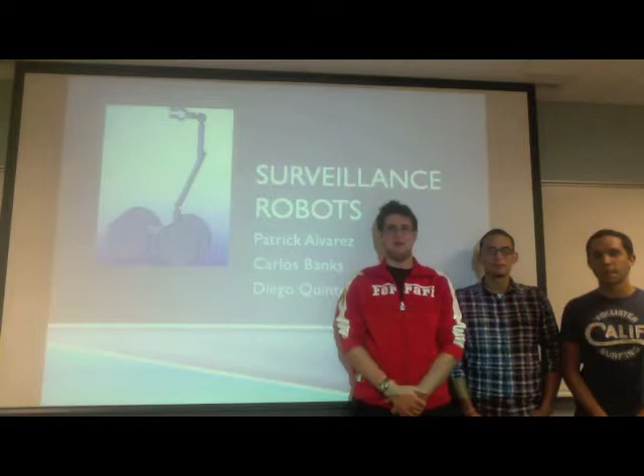Hello, my name is Patrick Alvarez, this is Carlos Banks and Diego Quintero, and for our modeling and design of robots class, we were tasked with the project to review surveillance robots.

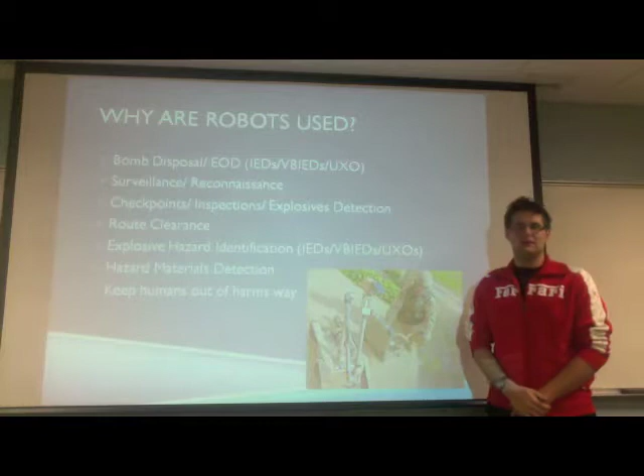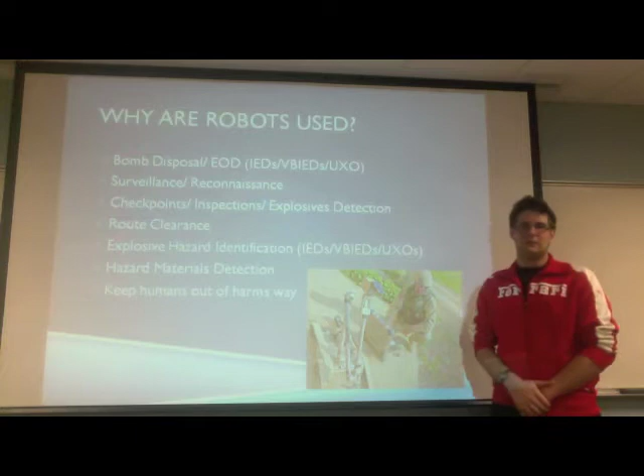So why are surveillance robots used out in the real world? Now, surveillance robots are tasked with objectives that could be dangerous or harmful to human beings. They're used in the military to perform tasks such as bomb disposal, surveillance and reconnaissance. They go through several checkpoints and they inspect several areas, mainly for explosives.

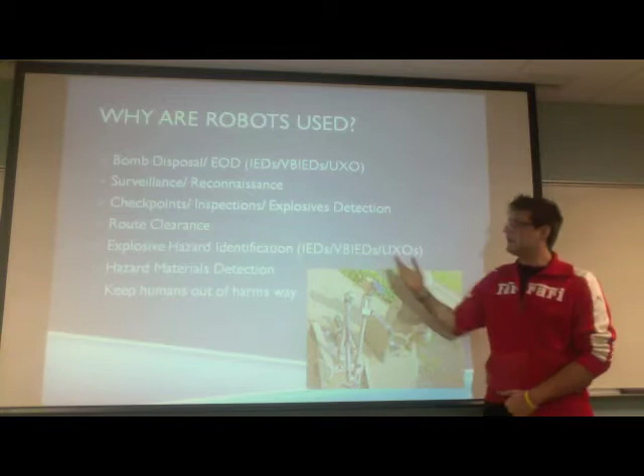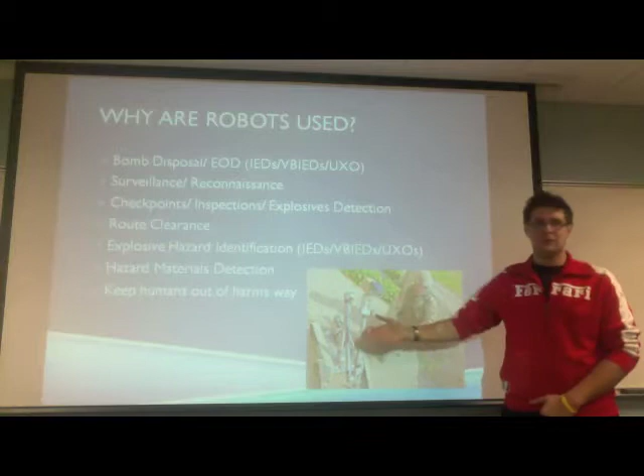They clear the routes ahead of the troops to make sure that there's no hostiles in the area. They perform explosive hazard identification and hazardous materials detection. And this is all with the sensors that are on the robot.

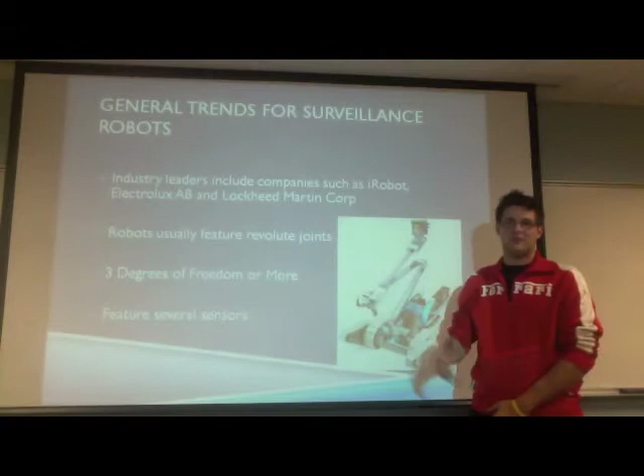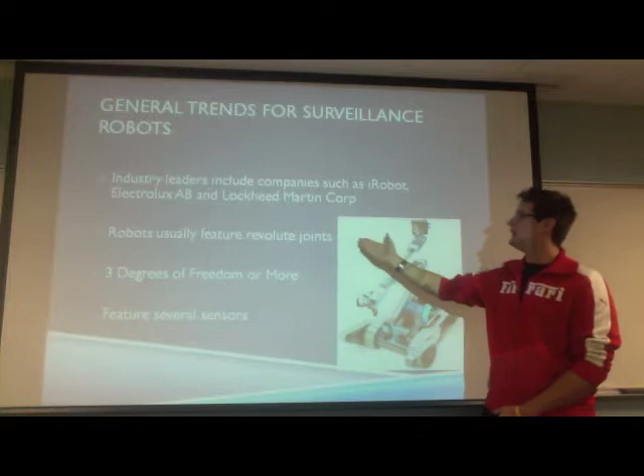General trends for surveillance robots. In this industry, there are three main companies that lead the way for surveillance robots. These companies include iRobot, Electrolux AB, and Lockheed Martin Corp. These companies are the ones that take innovation to a whole new level and develop new surveillance robots constantly.

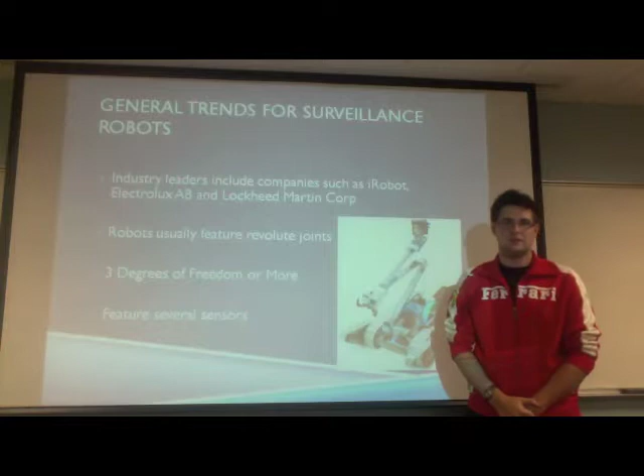Now, surveillance robots usually feature revolute joints. The main surveillance robots feature these joints. Of course, there are some robots that feature prismatic joints as well. They usually carry 3 degrees of freedom or more, depending on the application they are needed for. And of course, they feature several sensors for all the tasks that they are tasked with.

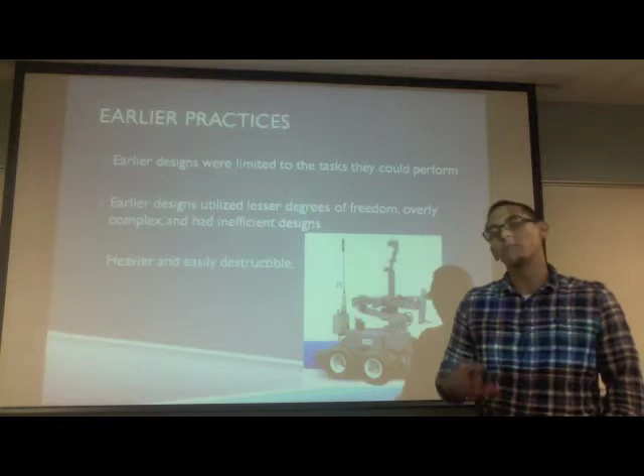Some earlier design practices for surveillance robots include that they were limited in the tasks they could perform. What this means is that they could only perform 1 to 2 applications at a certain time, whereas robots nowadays are able to conduct more types of applications. Also, earlier designs utilized fewer degrees of freedom. What this means is that they could only go up and down or left and right.

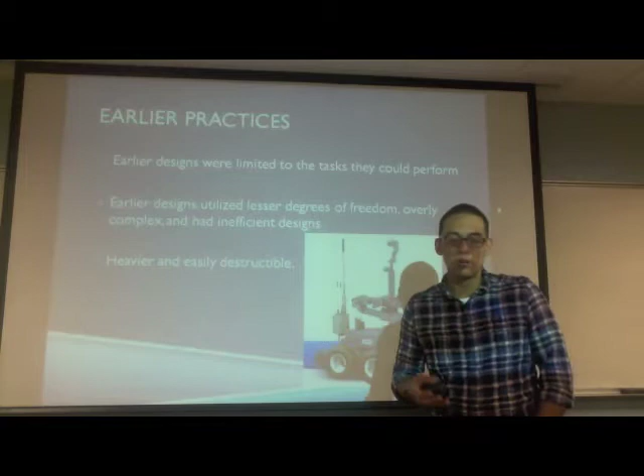And also, the designs were more complex and inefficient. Back then, the technology that they had to put inside the robots was cumbersome and inefficient. Also, the robots were heavier and were easily destructible, whereas nowadays they're reinforced with stronger materials. And as you can see in the future slides, some of the applications they can perform.

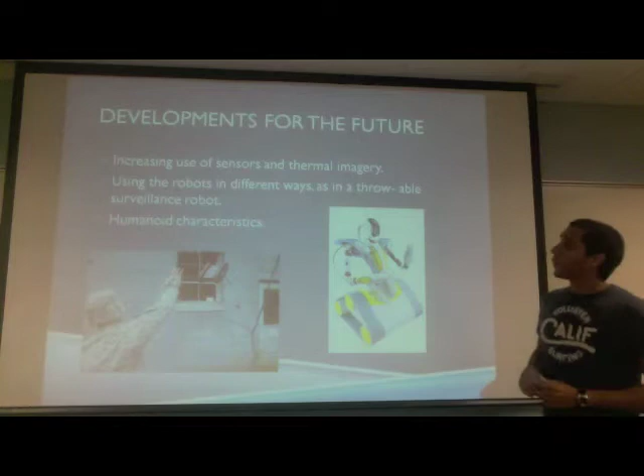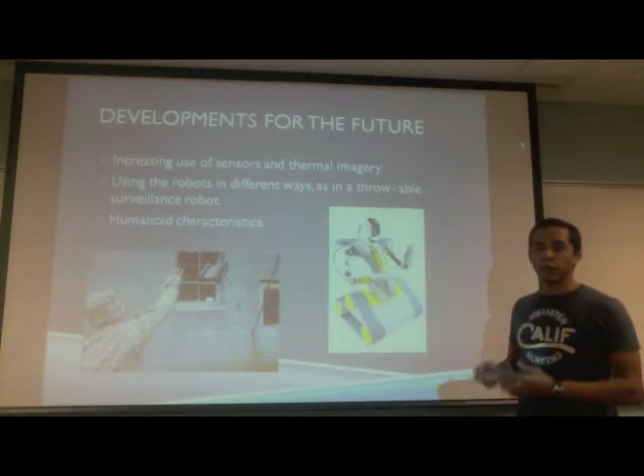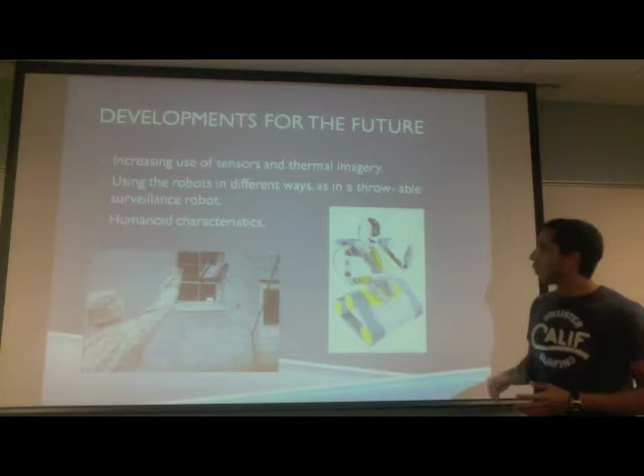Developments for the future for this type of robot include the increased use of sensors and thermal imagery in order to detect human bodies. Also, this robot could be used in multiple applications and could be used to do multiple tasks at the same time. This robot will also acquire humanoid characteristics, as you can see in this picture. The robot will pretty much look like a human. That design allows them to have more degrees of freedom and perform their tasks with more efficiency.

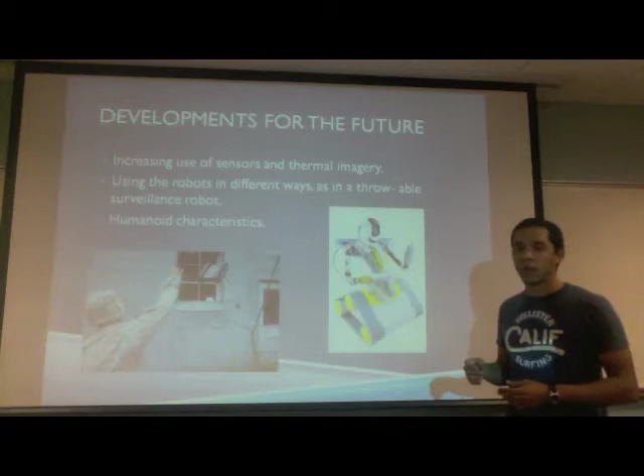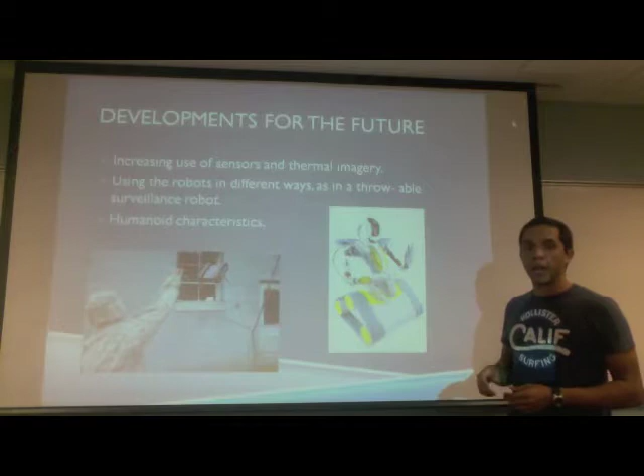Also, the materials to be used in the robots of the future include very high quality material that will allow them to endure and go through tough terrain, and also they could receive high level impacts and keep performing their task without a problem. As you can see in the next video, it will show a robot from this company.

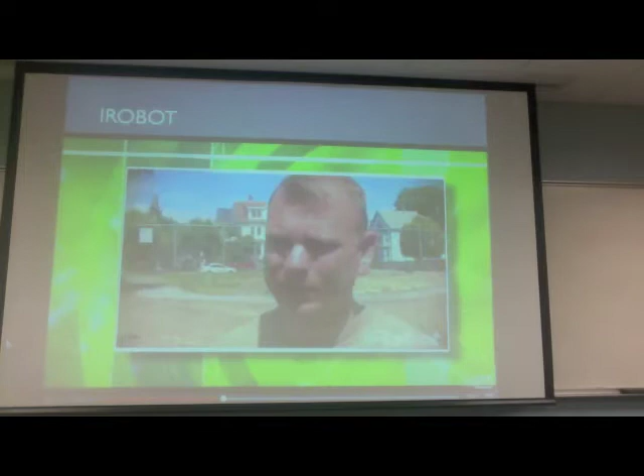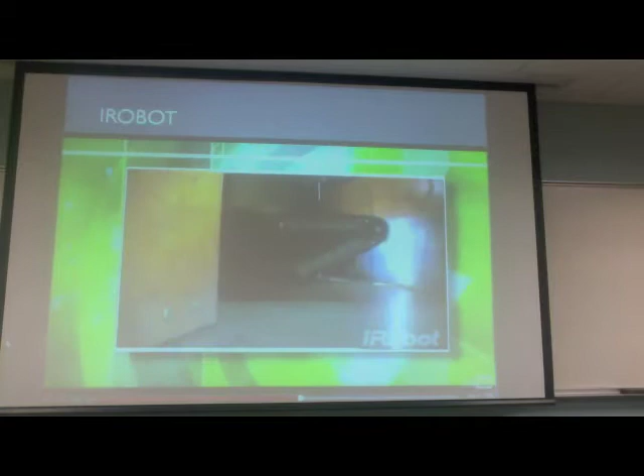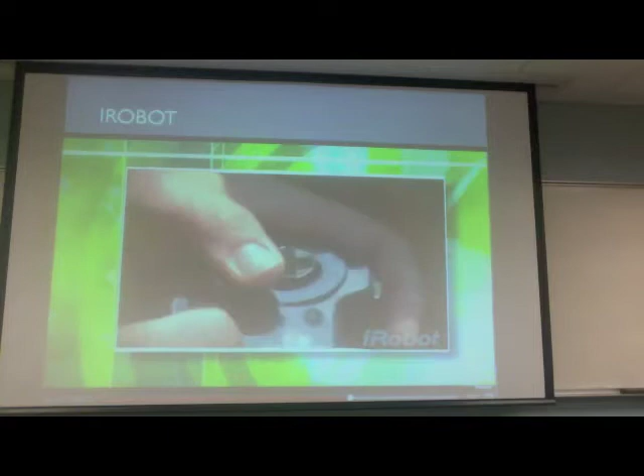Very versatile, very real. In a situation we don't have to actually put one of our attack team members too close to the situation. You just don't know what you're going to encounter. I see the delay. By having this, we can actually get eyes inside the building. Being able to push doors open, get around doors, and look around corners, it's great. The video was perfect. The 3D model in the bottom right corner makes it a lot easier to see exactly what the robot's doing. Picking up suspicious devices, looking through windows of cars, underneath cars, inside buildings to locate barricaded subjects. You can really remove the officer from any danger.

As you can see in the video, this robot features very high-end characteristics and very modern features that will allow it to perform all of those tasks without any problem. Now, Carlos will discuss all of our designing process.

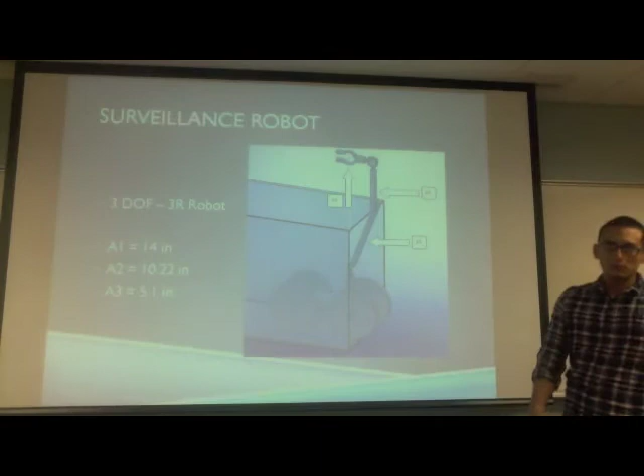This is the surveillance robot that we came up with. It's a 3 degree of freedom, 3 revolute joint robot. We picked a 3 revolute joint over a prismatic or a PRP or RPP robot, simply because of the availability and the accessibility that the 3 revolute robot offers to this design. Also, we picked a 3 revolute robot so it could comply with the tasks that we wanted it to do.

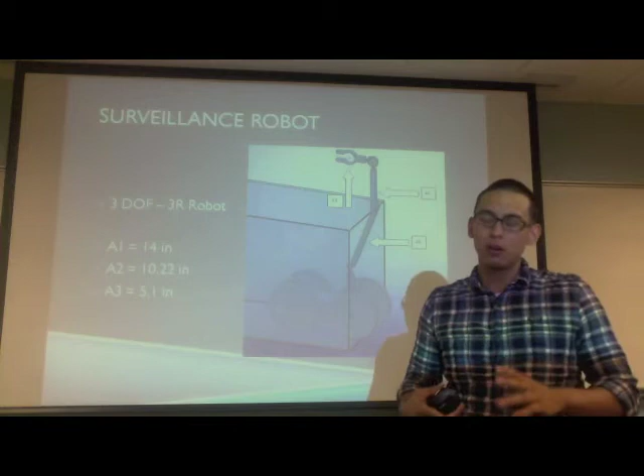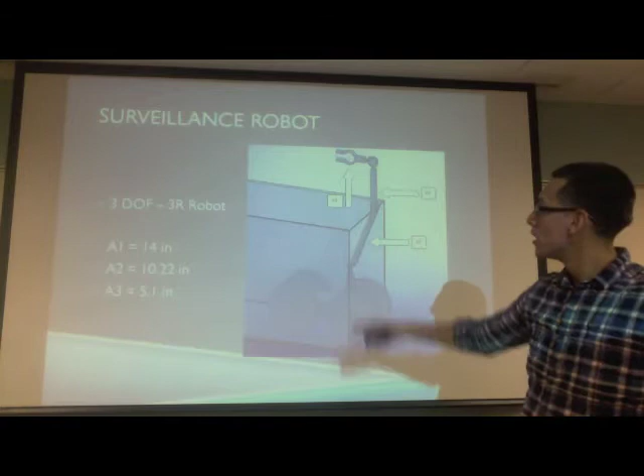For A1, we came up with a design specification of 14 inches. A2, we picked 10.22 inches, and A3, we picked 5.1 inches. The objectives for this robot, we wanted to infiltrate an air duct system with dimensions of up to 20 inches by 25 inches, or as low as 8 inches by 14 inches.

The duties for it to do was to detect possible threats above and below the air duct. Some of the things that we wanted to detect were possible hostiles or hostages in certain situations. We broke down the tasks into task 1, when the robot looks underneath the AC duct to inspect the area underneath, and task 2, to inspect the area above for other situations.

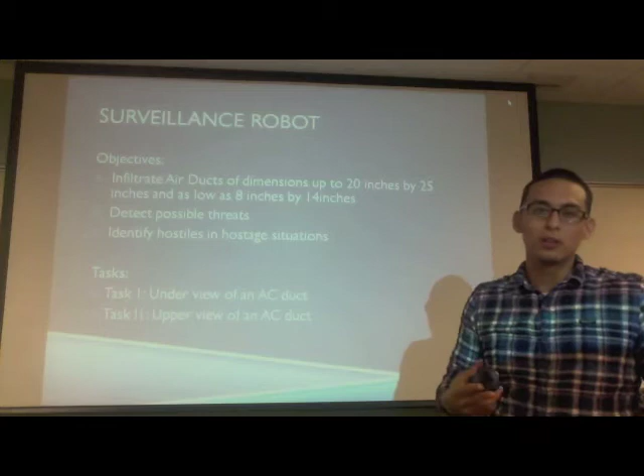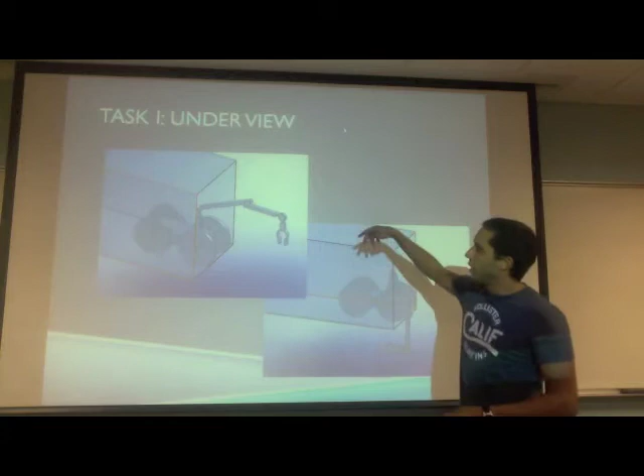Now, as Carlos said, in task 1 the robot will be performing an underview of the duct. So in the first position, it will start at 0 degrees, and the end effector will have a negative 90 degrees rotation pointing to the floor. Then it will move in a circular path all the way to 180 degrees in order to look all the way underneath the duct.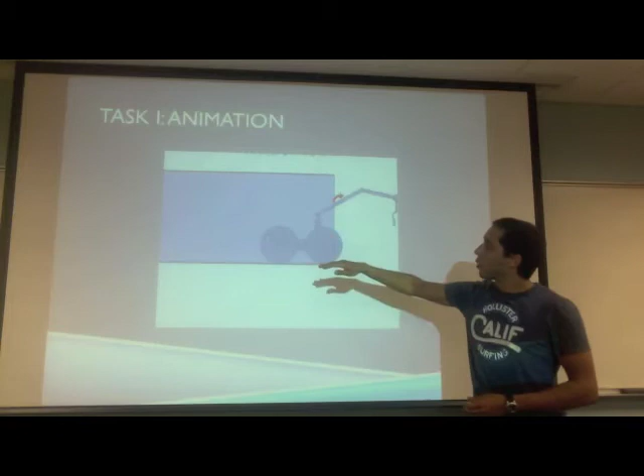If we go to the next slide, this is a rendering in SolidWorks, and as you can see, the robot starts from 0 and goes all the way through here and stops here in order to see all the way underneath the duct. Also, the robot will move on the line of the duct at this position, so it won't crash with either of the sides of the duct.

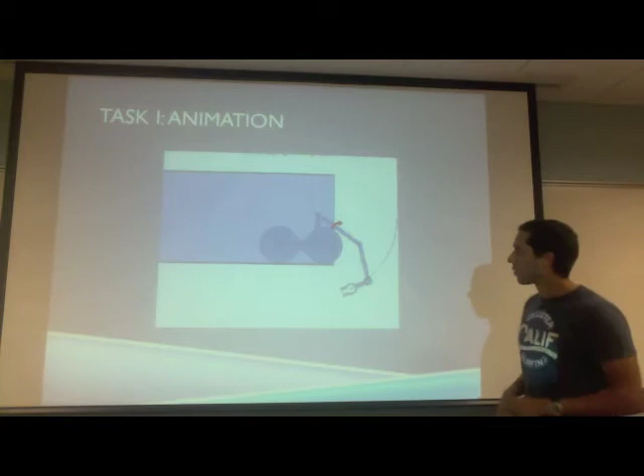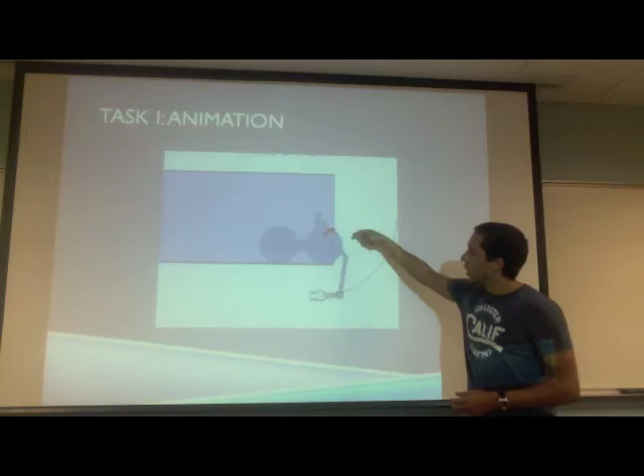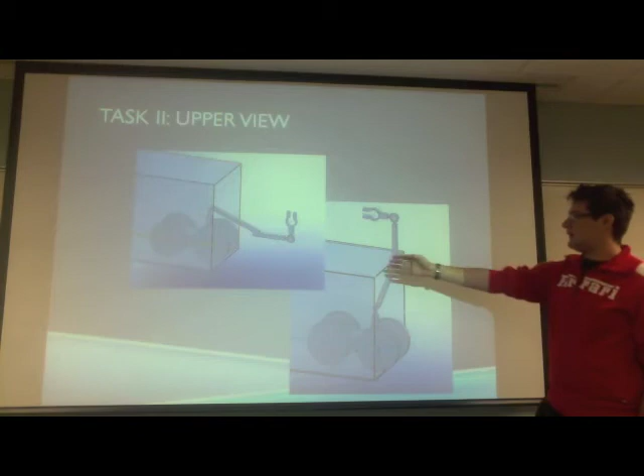Also, we designed our robots in order not to experience any singularity position, and not to crash when it goes down, not to touch itself or the duct. So in contrast, the second task had to be to look above the air duct. As you can see, our surveillance robot will start at positive 90 degrees and move to 180 to effectively see over the air duct.

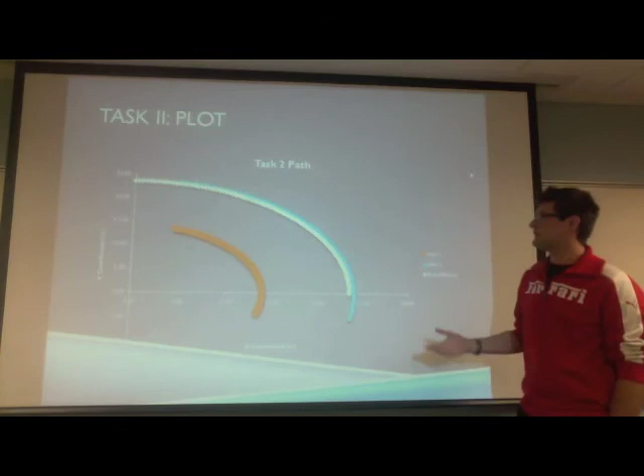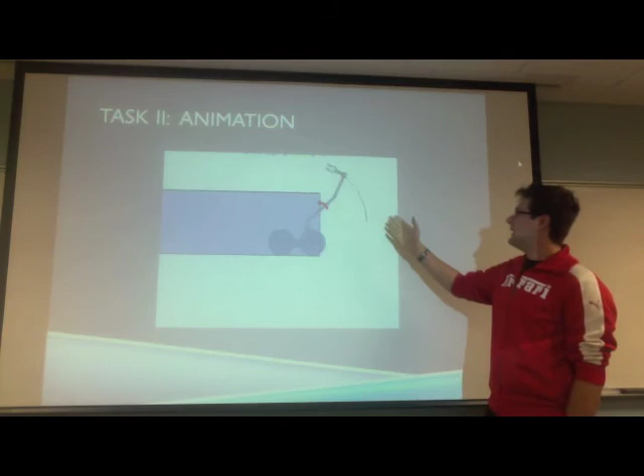As we can see in the task 2 plot, the plot is basically a mirror image of task 1. With the end effector movement, as well as the movement for joint 2, it moves exactly the same as task 1, and joint 1 moves with the same radius. There's no jumping between points, which also means it is not going through a singular position. As we can see here in the animation of task 2, it is performing the objective that it was asked to do, it is not making contact with any structures, and it is performing its task effectively.

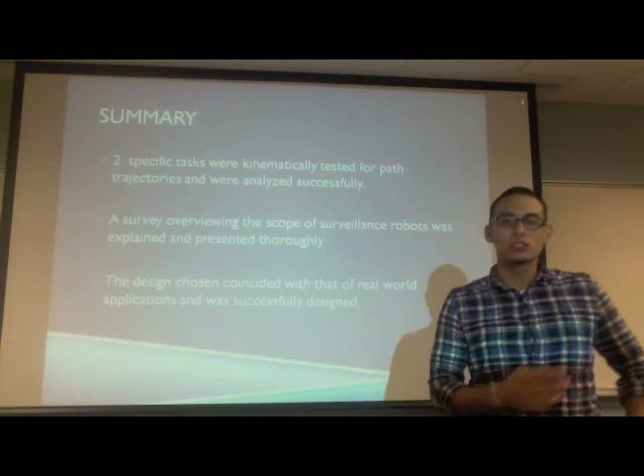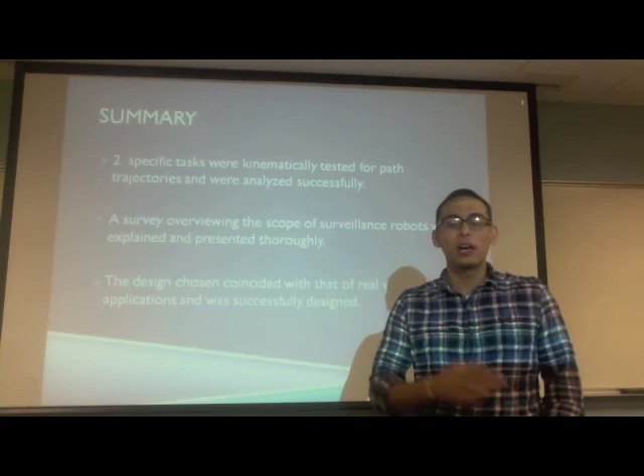The overall summary and conclusion of this project: there were 2 specific tasks that were kinematically tested for path trajectories, and they were analyzed successfully, one time in Excel and another time in SolidWorks, and both of the analyses matched up and correlated. Also, there was a survey overviewing the scope of surveillance robots, and it was explained and presented thoroughly with the past, present, and future applications.

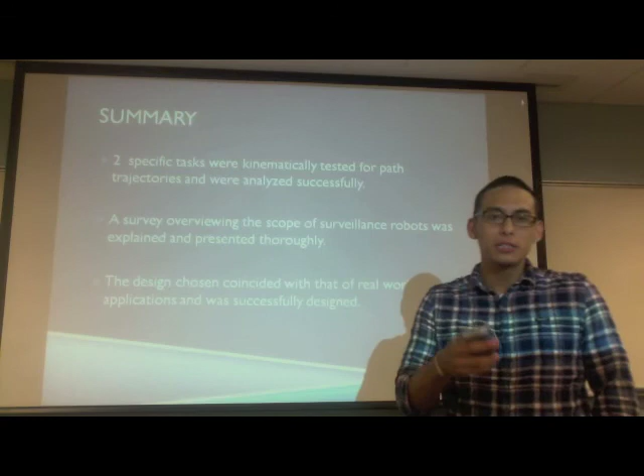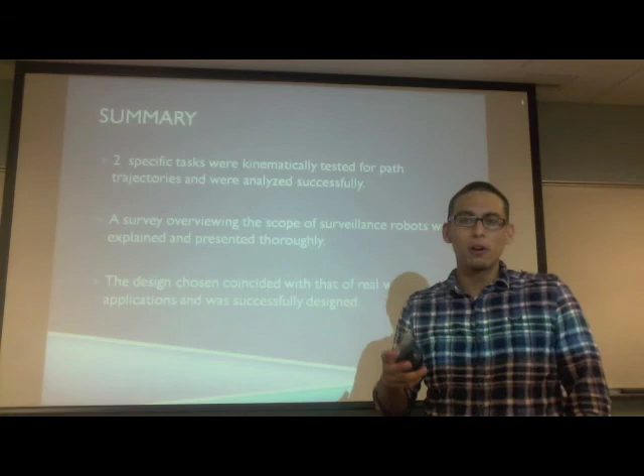The design chosen coincided with that of real-world applications and was successfully designed. We based our design off previous designs from iRobot and from Lockheed Martin, and the design that we came up with satisfied the task that we intended it to complete.